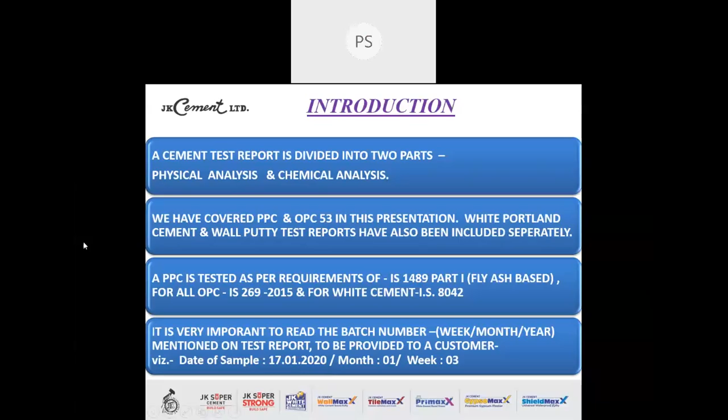Next, we have started the physical analysis. The first and important parameter under physical analysis is the setting time. Setting time is very important because if it is too slow, it will cause pumping issues, especially at high-rise structures. If the setting time is too fast, it may cause other delay issues. So we'll look into it.

Initial setting time (IST) for OPC 53 as per IS code requirement is minimum 30 minutes, as shown in the table above. The OPC 53 actual results in India are between 100 to 150 minutes. The final setting time (FST) maximum is 600 minutes - no cement should set beyond 600 minutes. Indian cements show a final setting time range of 180 to 210 minutes, about 3 to 3.5 hours.

For PPC cement, the requirement is the same, minimum 30 minutes and maximum 600 minutes. In India, actual results for initial setting time for PPC are between 120 to 150 minutes, and for final setting time between 180 to 240 minutes.

Now we look at the points below. The setting time of cement paste is defined by its initial and final sets. The initial set is when the cement paste begins to stiffen considerably, and the final set roughly indicates the time at which the paste has started to harden just enough to support some load. So when it begins to stiffen, it is the initial setting time, and when it begins to harden just like a stone, it is the final setting time.

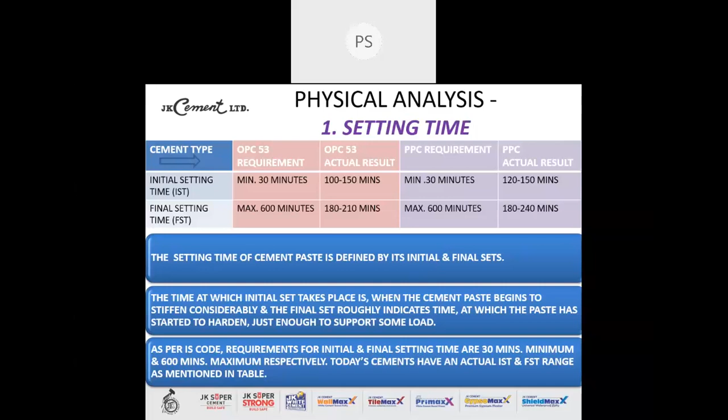Next please. The setting time is controlled by a chemical called gypsum, that is CaSO4 or CaSO4.2H2O, gypsum anhydride. Gypsum is added in about 3 to 5% range in cement to control its setting time, so the gypsum acts as a retarder. The more the quantity of gypsum, the more the setting time, and vice versa.

Second point, IS code requirements for IST and FST are the same for both OPC and PPC, that is 30 minutes minimum and 600 minutes maximum.

Third point, a cement that sets too fast may cause sudden concrete slump drop and problems in concrete pumping at site. For example, as I come from Bombay, we have very high-rise structures and the concrete is produced in one location, say Bandra, and has to be transported to another location, say Dadar. It takes a minimum of 1.5 to 2 hours for a transit mixer to travel from Bandra to Dadar. In that time, the concrete should not set, but at the same time, it should be pumpable when it reaches the site. So if the cement setting time is too fast, it will cause pumping issues and the pump will get choked. A quality control engineer needs to keep a check on it.

A very slow setting cement may cause issues during de-shuttering. If the cement is very slow setting, it will cause delay in de-shuttering. For example, if you have cast a column in the evening and go to de-shutter the next morning, you will see that the concrete comes out along with the shuttering - this is caused due to delayed setting. A quality control engineer must ensure that the cement is of optimum setting time.

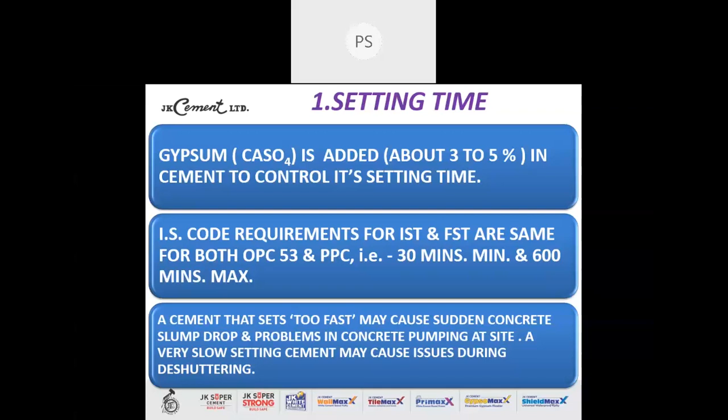Now, the second important point is the compressive strength. Compressive strength is measured as per IS code for 3, 7 and 28 days. Few cement companies also mention 1 day strength to highlight their high 1 day strength.

For OPC 53 requirements, 1 day strength is not available. OPC 53 actual results in India are between 18 to 25 MPa. 3 days minimum strength should be 27 MPa, and we get a strength of 35 to 41 MPa in India. 7 day minimum is 37 MPa, and we get 44 to 51 MPa. And 28 days, also called the ultimate strength, should be minimum 53 MPa for OPC 53, while we get a strength range of 58 to 65 MPa.

Now we look at the PPC requirements. Again, 1 day strength is not available as per IS codal provisions. We get a strength of 16 to 20 MPa in Indian cement conditions. 3 day minimum requirement is 17 MPa, and we get 22 to 28 MPa. 7 day should be minimum 22 MPa, and we get 34 to 40 MPa. 28 day should be minimum 33 MPa, and we get a strength range of almost double, 52 to 60 MPa.

If you look at the 1 day, 3 day, 7 day strength of PPC in comparison to OPC, PPC shows a slower rate of gain of strength, but at 28 days it almost matches the strength of OPC 53. And if you go further, 3 months, 6 months and 1 year, the PPC strength surpasses the OPC strength. This is on account of the secondary gel reaction that occurs because of the microsilica or silica particles available in PPC cement.

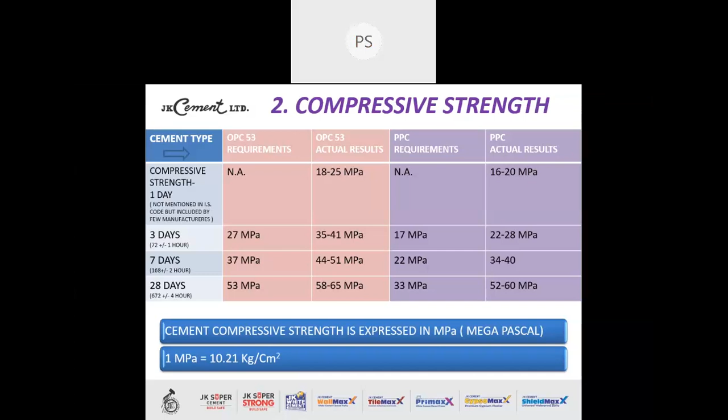Cement compressive strength is expressed in MPa, that is megapascal. Someone can also say it as Newton per mm square. 1 megapascal equals 10.21 kg per centimeter square.

Now, the compressive strength is the most important physical property that a consumer looks into. As a quality control engineer, you would definitely want the design strength to be achieved anyhow. So that is why it is the most important parameter.

Second point, cement is tested for 3, 7 and 28 day strength, and OPC 53 grade cement has a compressive strength of 53 MPa and above at 28 days. Minimum requirement and actual cement strength range for OPC and PPC are as given in the table on the previous slide.

Fourth point, few cement companies also mention their 1 day strength in the test report to highlight their high earlier strength. For example, we have very high rise structures in Bombay, and they normally use aluminum shuttering or Mivan shuttering, as we call it. They are just like a Xerox machine for a building, with each and every floor being a Xerox copy of the one above.

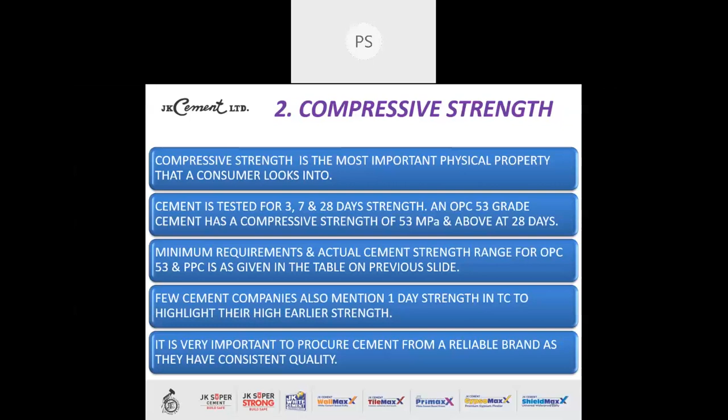And the last point, it is very important to procure cement from a reliable brand, as they have consistent quality. It is very easy for any cement company to manufacture a good strength, but to manufacture cement of good strength with consistent quality throughout the year is very difficult. We mention it in the form of standard deviation in the various properties. That is why for a quality control engineer, purchasing cement from a reliable brand is of utmost importance, because they have the required machinery and testing equipment to maintain consistent quality throughout the year.

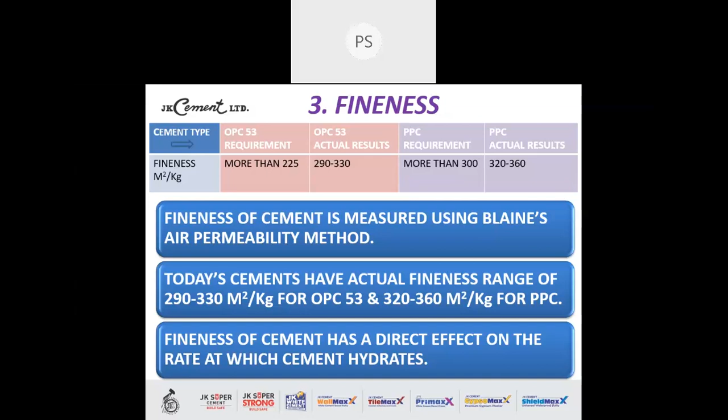Now we look at the definition of standard consistency. Standard consistency of cement paste is defined as that consistency, or percentage of water, which permits the Vicat plunger to penetrate up to 5 to 7 mm from the bottom of the Vicat mold. This is the classic definition as per the IS code. There is an apparatus, the Vicat mold, where you add percentages of water and get the desired standard consistency known.

Standard consistency or normal consistency (NC) is referred to as that percentage of water to be added to cement to make a paste of standard workable consistency. Higher the NC, higher the water demand, and vice versa. A cement with lower NC will have lesser water demand for making a workable concrete mix than a cement with higher NC. Hence, such a cement will be preferred by a quality control engineer at site.

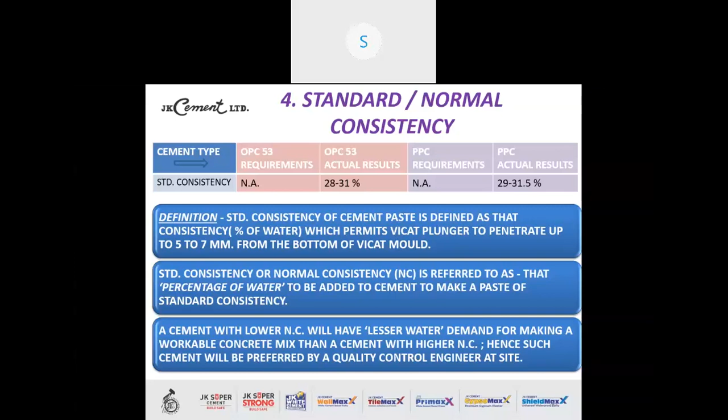Now, soundness of cement is again a very, very important parameter. It determines the durability of concrete in the long run. IS code says 2 tests need to be done to understand the soundness of cement.

First is the Le-Chatelier method, where soundness is measured in millimeters, with a maximum range of 10 mm. Second is the autoclave method, where expansion is measured in percentage, maximum 0.8%. The OPC 53 actual results in India are between 0.8 to 1.2 mm and 0.01 to 0.15% respectively. The PPC requirements as per IS code are the same - maximum 10 mm and maximum 0.8% respectively. We get an actual result range of 0.8 to 1.2 mm and 0.01 to 0.15% respectively.

Now what is soundness? Soundness refers to the ability of hardened cement paste to retain its volume after setting, without the delayed destructive expansion caused due to presence of excessive free lime (CaO) or magnesia (MgO). If there is presence of excess free lime or magnesia, it will cause an expansion in the concrete, and there will be a delayed destructive expansion which will cause internal and external cracks in the concrete.

Unsound cements have a tendency to undergo large expansion after setting. If the cement is unsound, it will expand, which may cause serious durability issues, and soundness tests are conducted for this reason.

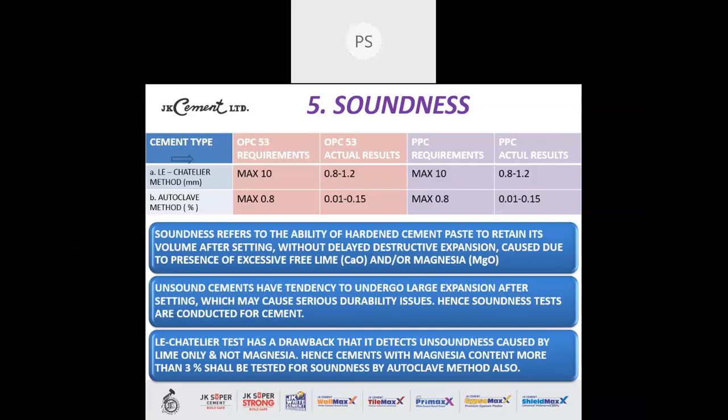Now we look at the chemical analysis. The first part in the chemical analysis is the loss on ignition, LOI. LOI should be maximum 4% in OPC 53.

OPC 53 actual result range in India is between 1.5 to 3%. PPC requirement maximum is 5%, and PPC actual range in India is between 1.5 to 3%. This test is conducted at 950 degrees Celsius, and it gives an indication of prehydration and carbonation of cement.

The amount of LOI is generally an indication of the freshness of cement. Fresher the cement, lesser will be the LOI, and vice versa. For LOI, the guidelines for OPC 53 are slightly stricter than that for PPC. It is 4% for OPC and 5% for PPC.

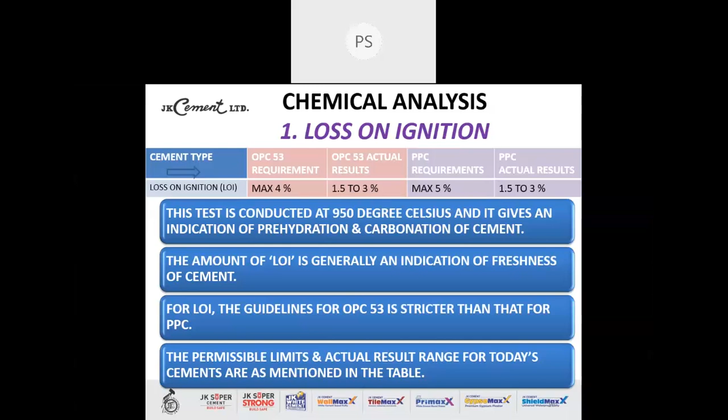This is because PPC has an additional content of fly ash added to it during manufacture, and this fly ash may contain some carbon content, unburned coal content, due to which the LOI may increase. That is why the limit is 5% for PPC. The permissible limits and actual result range for today's cements are as mentioned in the table above.

The second and very important parameter for the chemical analysis is the insoluble residue, IR. OPC 53 maximum should be 5%. In India we get a certain range for IR.

The PPC requirement is calculated by the formula in the 100 minus X bracket, where X is the declared percentage of fly ash added by the manufacturer. PPC actual result range is between 18 to 38% for insoluble residue.

Now, what is insoluble residue? Insoluble residue is the material in the cement which does not take part in its initial cementing action. This residue material affects the properties of cement's early compressive strength.

As I mentioned earlier regarding strength of PPC versus OPC, the 1 day, 3 day, and 7 day strength of PPC is very low in comparison to OPC. This is the reason why insoluble residue is very high in PPC, and why it lags in the 1 day, 3 day, and 7 day strength. As the secondary gel reaction due to the fly ash starts occurring, the ultimate strength increases.

The 28 day strength, and later strength at 3 months, 6 months, 9 months, 1 year, ultimately goes on increasing, and at a particular point of time it surpasses the strength of OPC also. So that is the reason why PPC cements have slightly lesser strength initially.

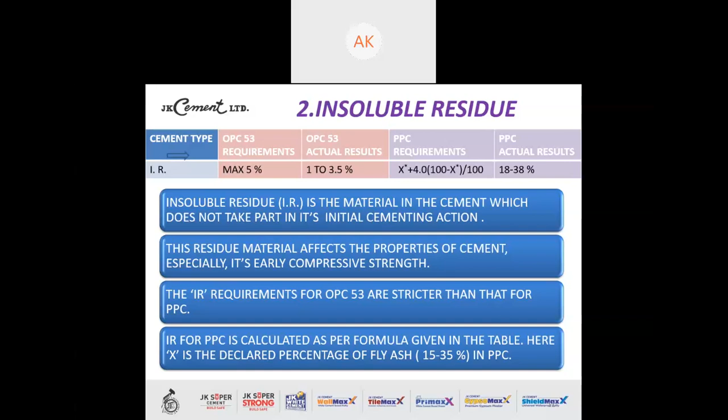The IR requirement for OPC 53 is stricter than that for PPC. Actual results for OPC are between 1 to 3.5%, and for PPC are between 18 to 38%. So there's a big difference. Fourth point: IR for PPC is calculated as per the formula given above.

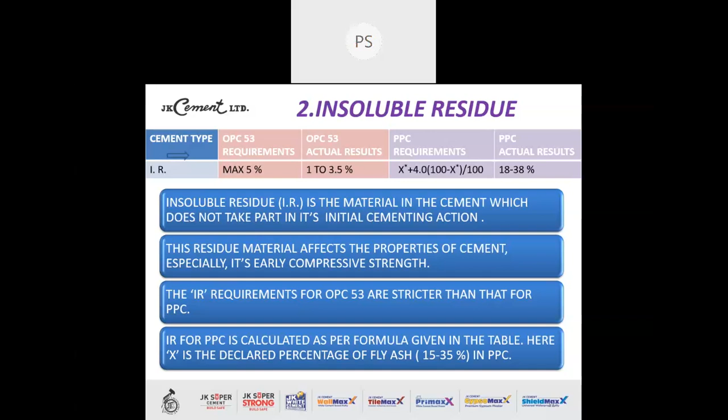Here X is the declared percentage of fly ash, 15 to 35% in PPC. The IS code says there should be minimum 15% and maximum 35% fly ash that can be added by the manufacturer to manufacture PPC cement.

The third important parameter is the sulfur content as sulfuric anhydride, SO3. SO3 should be maximum 3.5% as per IS for OPC 53. The requirement is again the same for PPC, maximum 3.5%. We get our actual result range of around 2.5% in India.

The first point: the SO3 in cement is mainly contributed by gypsum, CaSO4, which is added to control the setting time of cement during the hydration process. From the CaSO4, the CaO gets separated and SO3 is released, which joins the overall SO3 content in the cement.

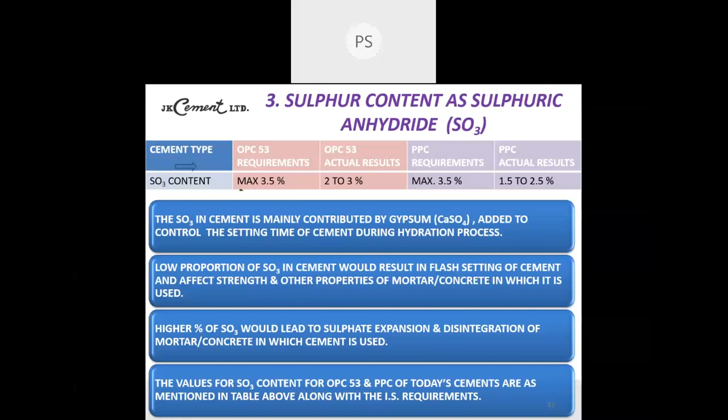Low proportion of SO3 in cement would result in flash setting of cement and affect the strength and other properties of mortar or concrete in which it is used. Higher percentage of SO3 would lead to sulfate expansion and disintegration of mortar or concrete in which cement is used. So SO3 content should be within 3.5%, otherwise it will cause sulfate expansion. The values for SO3 content for OPC and PPC for today's cements are as mentioned in the table above, along with the IS requirements.

Fourth parameter is the magnesia content, MgO. MgO in OPC 53 should be less than 6%. The actual result range in India is between 0.5 to 3%. For PPC, the requirement is the same, less than 6%. We get a range of 0.5 to 3.5% for MgO.

If MgO is present in crystalline or free form above certain limits, it leads to unsoundness problems, that is volume expansion, leading to disintegration of cement mortar concrete. MgO is commonly found in cement raw materials. In cement clinker, it acts as a fluxing agent. Hence, a small percentage of it has a beneficial effect on clinker chemistry.

If you look at the previous percentages, they were only 1, 2, 3%. MgO has a higher percentage requirement, less than 6%. Up to 6% it is permissible, because a small percentage of it has a beneficial effect on clinker chemistry.

Third point, MgO along with tricalcium aluminate, C3A, and tetracalcium aluminoferrite, C4AF, form the liquid part of clinker. C3A and C4AF are two of the four compounds of cement. The four compounds of cement are C3S, C2S, C3A, and C4AF. So these two, C3A and C4AF, form the liquid part along with the MgO during the clinker manufacturing process.

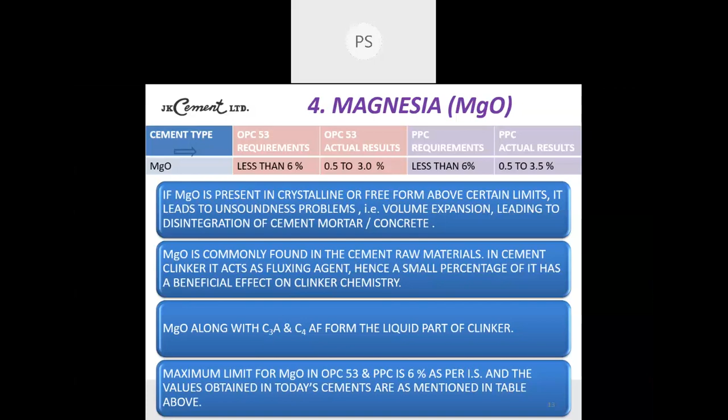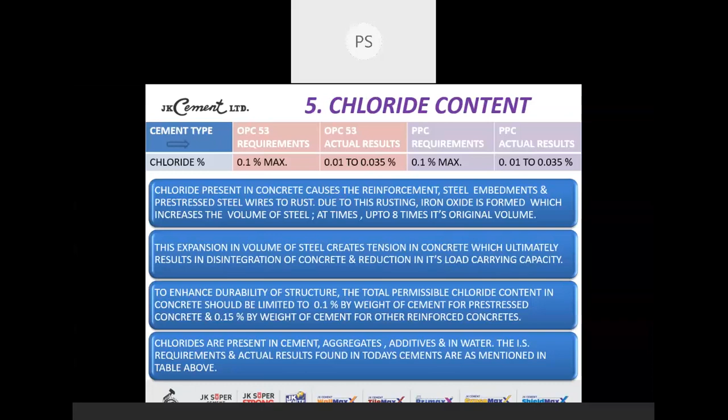The fourth point is, chlorides are present everywhere. They are present in cement, in aggregates, in additives, the chemical admixtures that we normally add to reduce the water demand of concrete or to retard it further, as in Bombay we do it very normally. And fourth is water, chloride is also present in water.

The IS requirements and actual results found in today's cements are as mentioned in the table above. It is very important for a quality control engineer to control the chloride content, especially in the cement as well as the additives or admixture that we are adding. In India, we normally add naphthalene-based or PC-based admixture, and they also have a considerable amount of chloride content in them.

For a quality control engineer, they should buy such admixture from a reliable brand and ensure that the chloride content is mentioned in the test report also, and it is within the permissible limit.

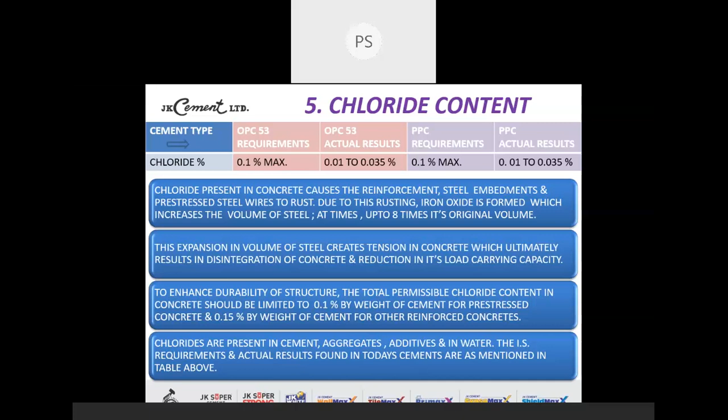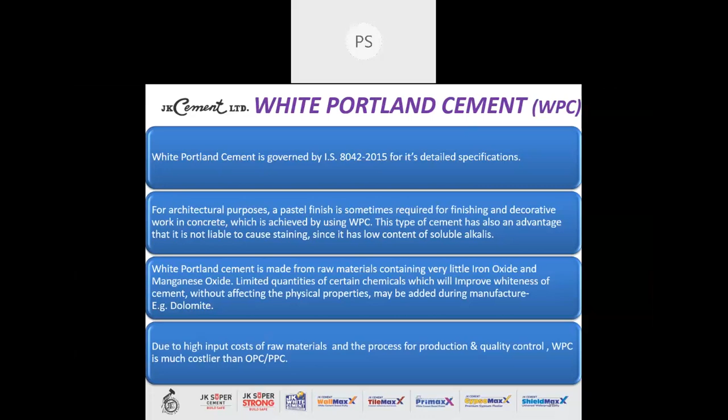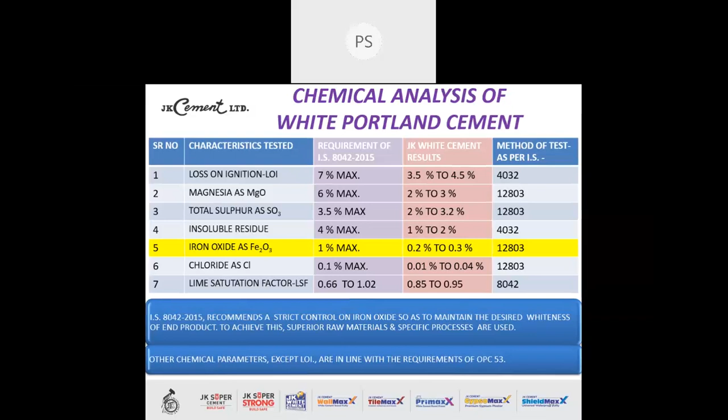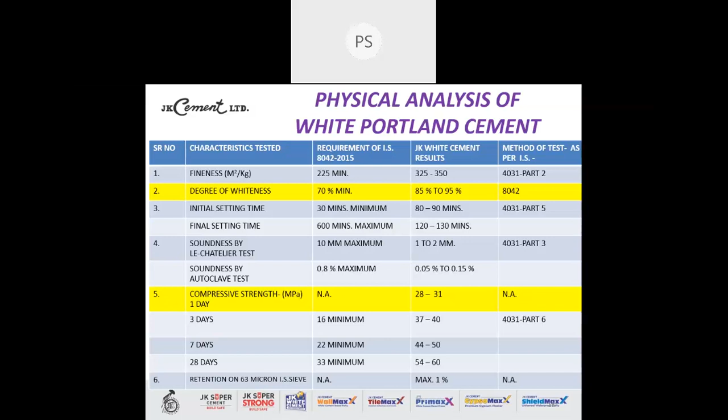Now point number 1, fineness, measured in meter square per kg. IS code says it should be minimum 225; we get a range of 325 to 350 meter square per kg for JK White cement, which is finer than any other OPC cement. Initial and final setting time, again the same: 30 minutes minimum, 600 minutes maximum. We get IST of 80 to 90 minutes and FST between 120 to 130 minutes. Now soundness test, again the same, Le Chatelier 10mm.